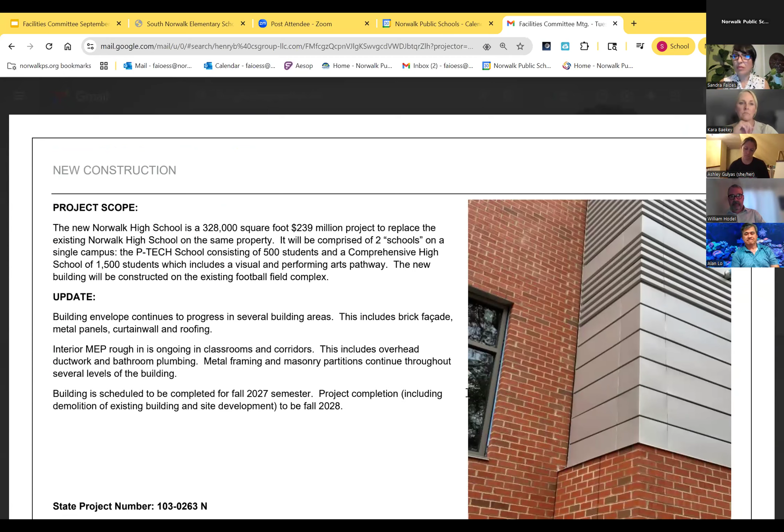Yeah, there's a few pictures in here. Portions of the building have windows and exterior veneers and brickwork and stuff. I think there's a couple more pictures after that showing some interior work.

So have you guys gotten a chance to go by? It is kind of exciting. Yeah, I went by the other night. It's going by pretty fast. Amazing. Wow, yeah, I'll have to get over there, I haven't been over there in a while.

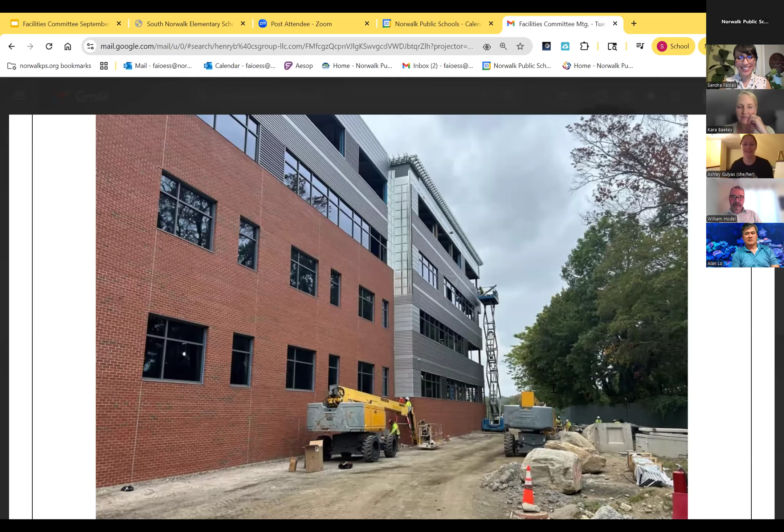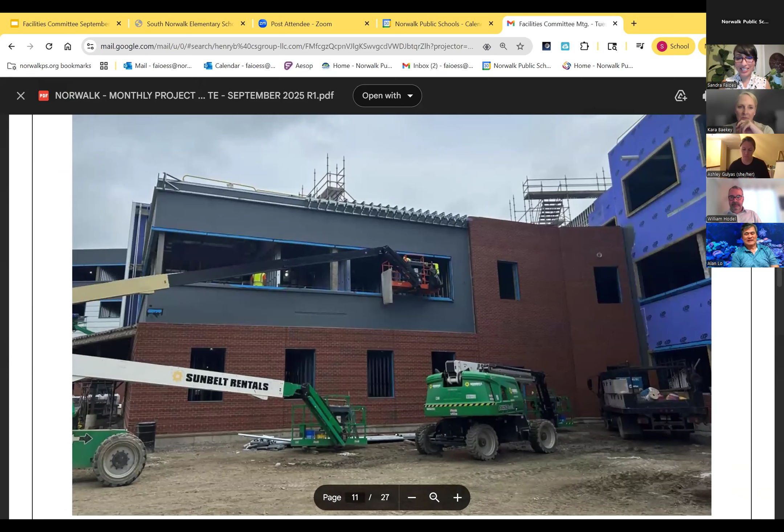And the building is not blue, it's just the panels. Wow, yeah, it's progressing.

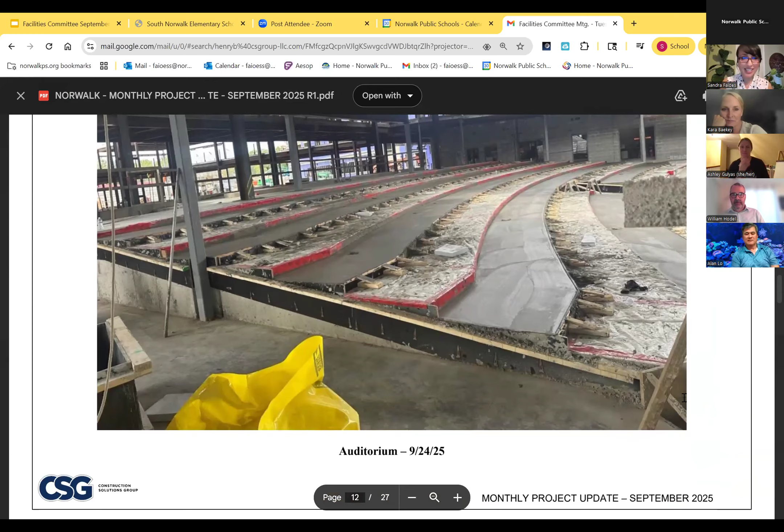Is that the auditorium area or something? I don't know what this picture is of. Is that the auditorium? Yes, that's a good guess. Yeah, so you can see the interior - there's quite a bit of interior wall and door frames up and stuff like that.

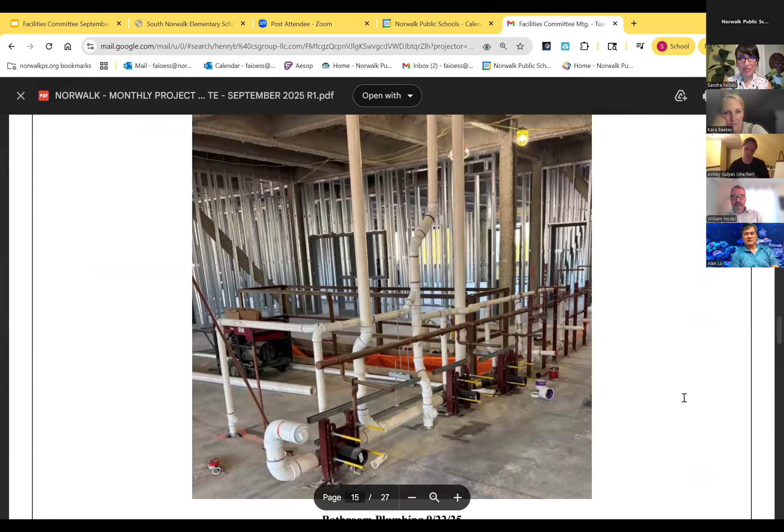Anyway, so that's where we are. I'm not planning to do any tour anytime soon, but at some point we may do a construction tour.

And the next project is South Norwalk School. As everyone knows, the school was opened, and for the fall semester we had the ribbon cutting ceremony. There we are. So everything worked out well.

Overall, a lot of times when we open a school, we always have some punch list items and miscellaneous issues that we need to continue to address. So we continue to meet every Tuesday to address all of the miscellaneous things. But the good news is that there's no major issues that we are encountering. It's just really touch up this and deal with all the miscellaneous issues typical with any construction project. So overall, it's a good thing.

I believe there's still... yeah. So anyway.

One thing I'm glad, just on a sidebar, one thing I'm glad is that I was never pushing to acquire that property, because there's a lot of stuff involved. But as I go through the ribbon cutting and see the whole property as a whole, I'm glad that we did it.

The council was pushing me to do it, and we did it. Well, I don't have a choice when they push me, right? At the same time, it's just a lot of work to acquire, and it's a lot of money. I mean, we spent probably like $3 million, or more than $3 million, to acquire all this property. But at the end of the day, when you sit out there with a basketball court, it makes such a difference.

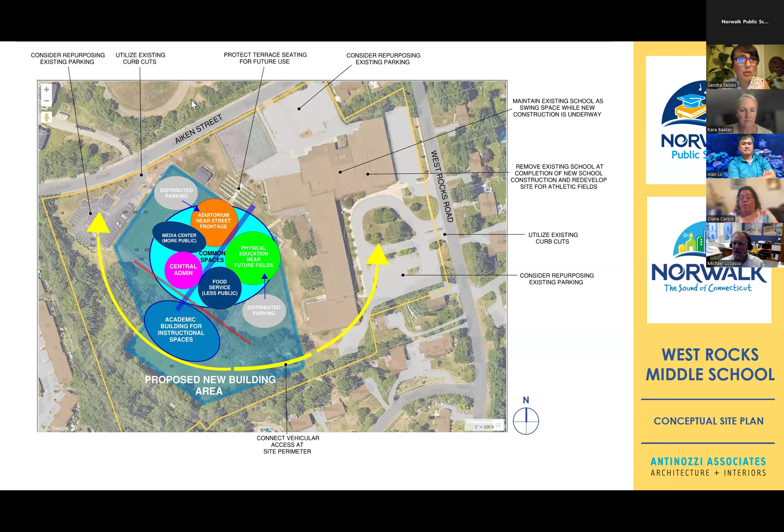Are you able to see it now? Yes, thank you. Okay Michael, do you want me to go back one, or are you okay with this? If you could, yeah, go back one, that would be great. I don't think it's allowing me to do both. We can start here then. That's fine, I don't want to... oh, okay, my apologies. Okay, what I won't do is share full screen, it won't allow me to manipulate it. Is this okay though to start here? That's perfect. Is everybody able to see the screen adequately?

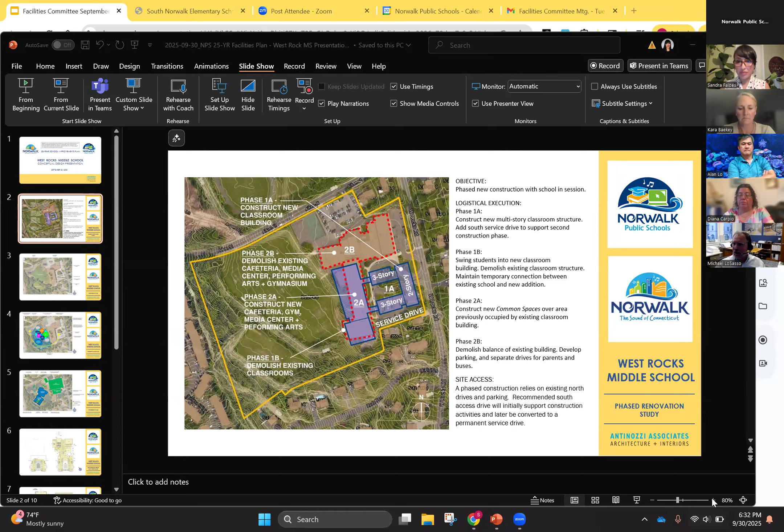Perfect. So, as Sandra rightfully clarified, our effort on this project was really essentially developing a conceptual plan, looking at different alternatives as to how we could execute the work associated with a modification to the West Rocks School. The plan before you was actually done previously. When we began the project, there was initially concern about developing on the portion of the site that had the fields.

Although I think we all agreed that was the logical location for it, the fields were relatively new, and there was concern that if we did so, we could potentially lose the use of newly installed fields. This particular plan was a sequential addition and renovation of the existing school, proposing a 2- and 3-story structure in the parking at the southeast corner of the site.

As that construction was complete, we would move students into that space, reflecting the academic sections, take down the academic 2-story section south of the existing West Rocks School, construct the balance of common spaces, and take down the rest of that section as well. That would ultimately provide a new school, but the sequencing and phasing suggested it would be significantly expensive, so we took a second look at this.

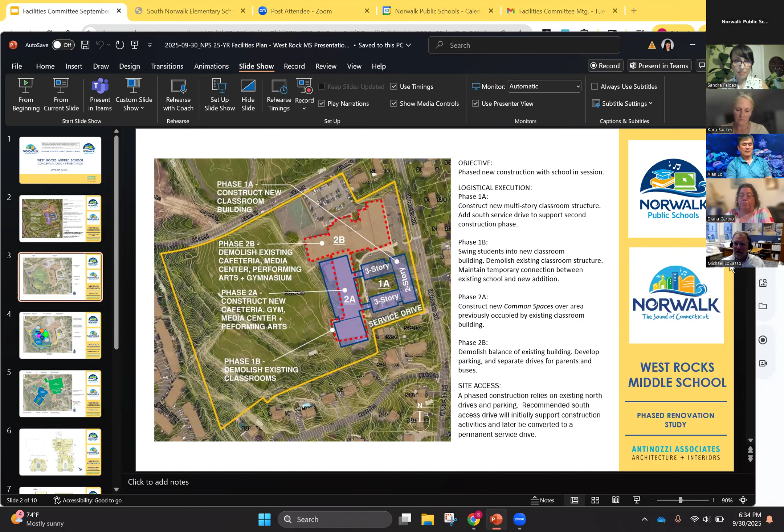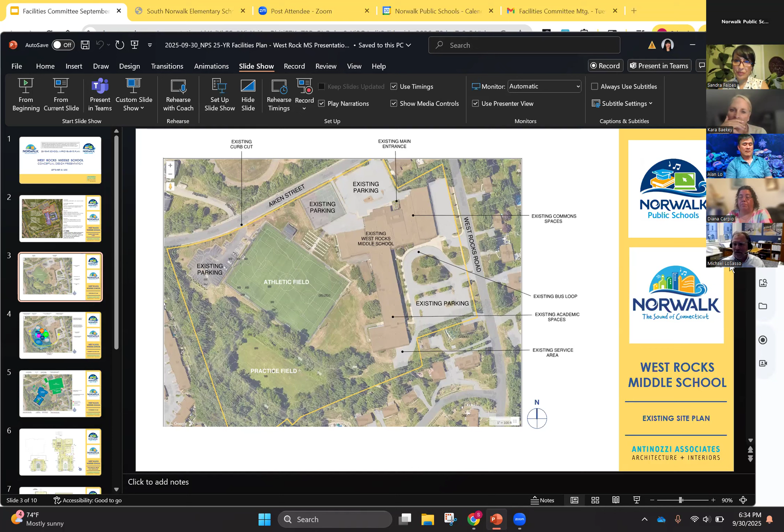If we could go to the next slide, please. This is just the existing site, and we provide this to give some insight into our approach. We identified specific aspects, both in terms of the configuration of the existing school and features we thought could be retained and reutilized, along with aspects of the new fields development that informed our future design.

Next slide, please. Thank you. This describes a diagrammatic relationship of spaces. What we found significant about the site was that if we were able to develop on top of the fields, doing so essentially allowed the existing West Rocks School to remain active without disruption, except for the absence of the athletic fields.

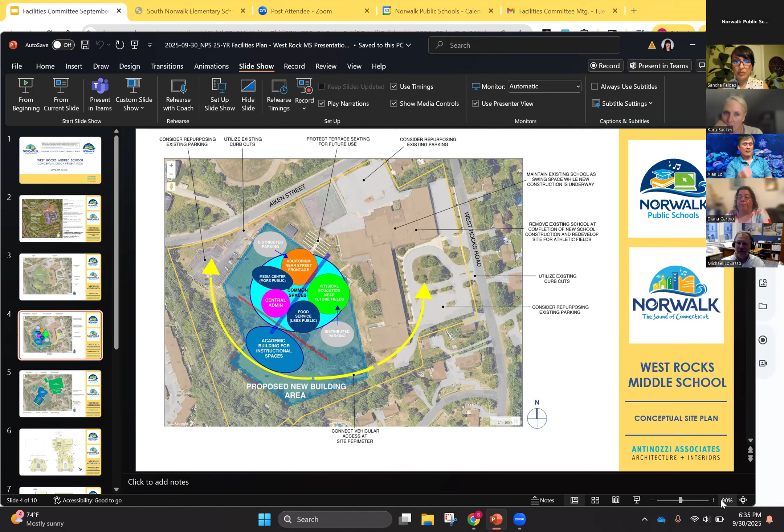We proposed the assembly of spaces informed in part by the existing terraces, the exterior seating provided for current sports viewing, and the orientation of the west parking lot in the northwest corner of the site, and began to array spaces in anticipation of the construction of a new school.

One of the challenges with the site is a fairly dramatic level change. We configured what we refer to as common spaces - the auditorium, cafeteria, those spaces oftentimes utilized after hours - in the upper field, and reserved the lower field, where the practice field currently is, a level below, for a multi-story educational section. The yellow line describes the connection of the drives, which is often advantageous for emergency responders and school access.

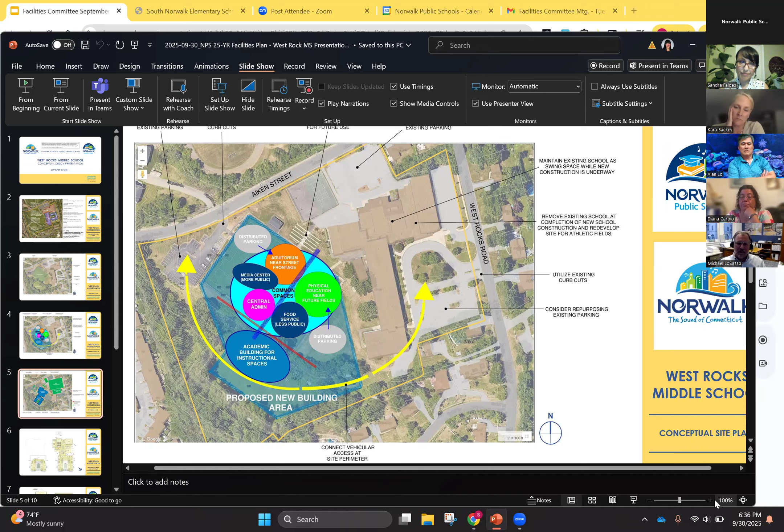If we could go to the next slide, please. This describes the conceptual plan that resulted from those initial conceptual layouts. What we've proposed allows a bus drop off on the northwest corner of the building, and an entirely separate parent drop off on the south side of the proposed new building.

The parent entrance off of West Rocks and through the drives provides extensive queuing, so we were proposing less impact on West Rocks and adjacent residential areas. Aiken Street to the north provided another existing curb cut that allowed the introduction of buses.

As I mentioned before, that terraced seating area on the exterior became a central feature of the building, providing an opportunity for outdoor seating for a two-sided auditorium. We'll look into the building - we'll have the opportunity to open the rear of the auditorium for outdoor presentations, as well as using the same auditorium with the closed rear for conventional auditorium use.

As I mentioned, we have the common spaces, primarily public spaces associated with the administrative offices in the center. The auditorium - we've programmed a gymnasium, cafeteria and food service, and a media center for the building, all at what we'd call the intermediate level. That intermediate level continues into the academic wing, and it's a level up or down for the different grades, so we've utilized floor level.

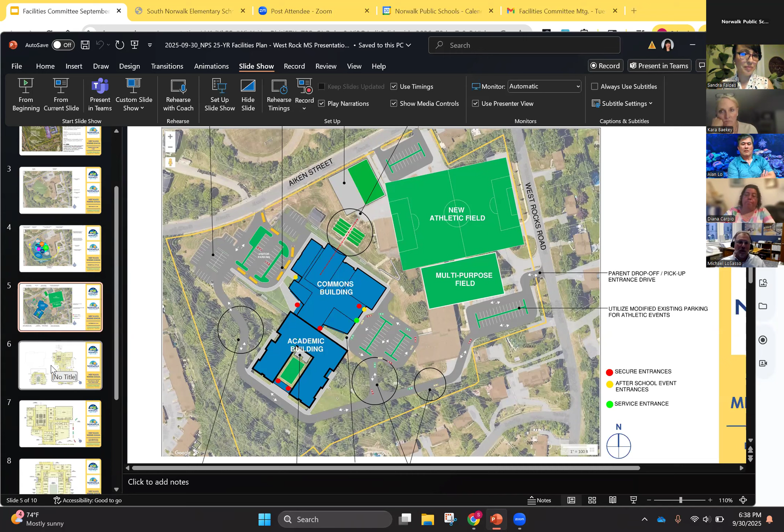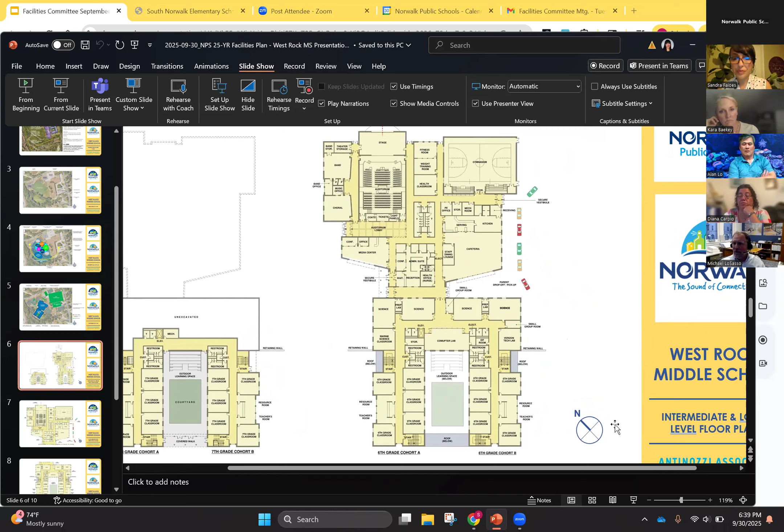This is a quick overview, and we'll zoom in a minute. The intermediate level is the plan on the right-hand side, and where the box shape at the bottom stops is the connection back to the academic spaces. So that plan on the right-hand side is the intermediate level that connects all the floor levels. On the left-hand side is a view of the lower level, one story down below this intermediate level, providing a complete section for a grade level.

I think in this case we actually had proposed the 7th grade, but really the classrooms as proposed are essentially standard for all grades, so it gives flexibility in terms of how they might be organized in the space, either lower level, middle level, or upper level.

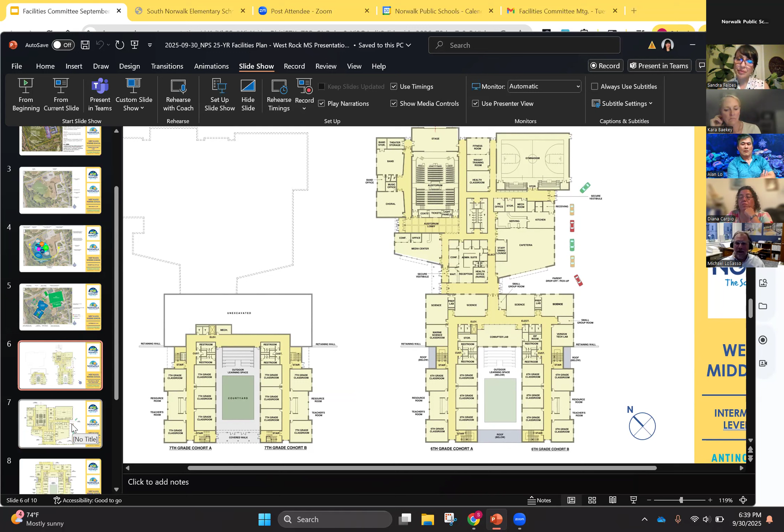The academic spaces are organized around an outdoor instructional and learning space, and each of the grade levels, 6th, 7th, and 8th, have 2 cohorts comprised of 5 classrooms.

For the purposes of this study, we assumed a total population of 720 students, essentially 24 students per classroom, though I do understand that there is a 28 student limit based on the teacher contract.

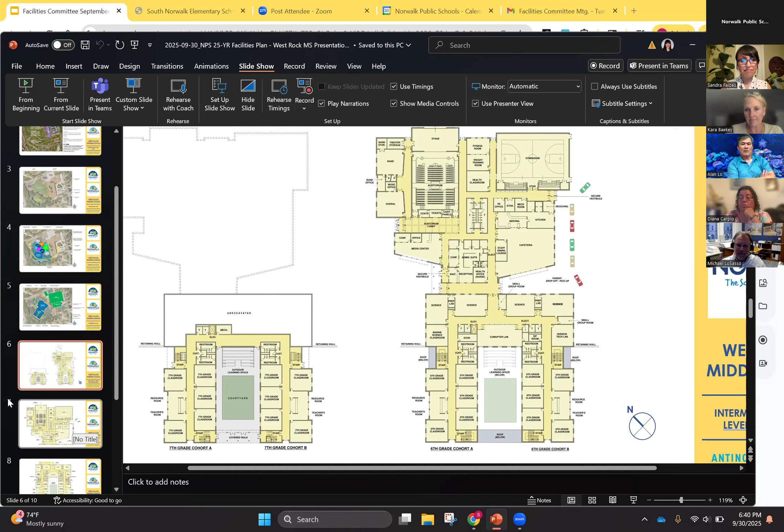If we go to the next slide, we can zoom in a little bit to this view of the common spaces. We've arrayed the spaces that tend to generate more noise, specifically the gymnasium, auditorium, music spaces, and the cafeteria in this area. We've separated them from the academic spaces to the south, and we've outfitted this to include band and choral spaces.

Essentially the program, though I have to mention this was developed without the in-depth educational specifications, which are currently being prepared. This was essentially a program that was derived from information gathered from the original building.

And as I mentioned before, we have the administrative suite centrally located in the building, and this provides us the ability to have the two entrances that we saw from the site plan, both from the north and south, so that students can then convey into the building in a controlled manner.

After school activities, the main entrance would be on the left-hand side, and that would be through a secured entrance, with appropriate resistance to intrusion.

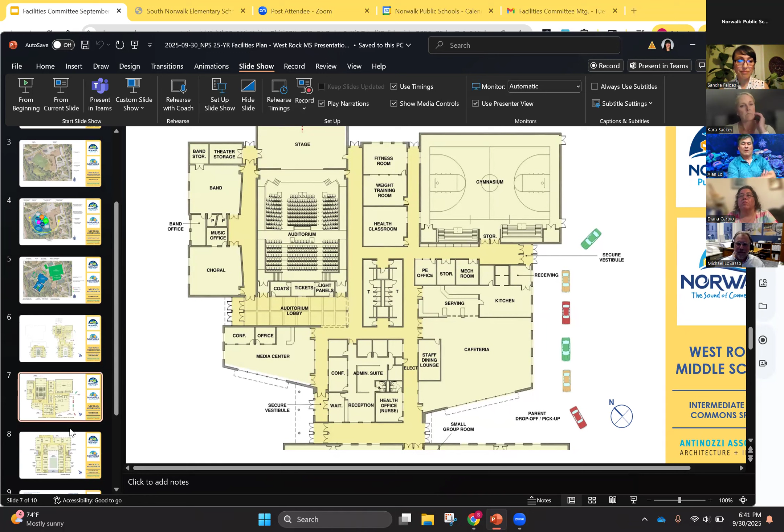And then if we go to the next plan, this is representative of the three different levels. On the upper portion, which is closer to the common spaces, we have classrooms associated with science and learning. This particular program envisioned a marine science classroom as well as a specific Verizon tech lab.

There's a centrally located computer lab as well. And then as you descend further into these spaces, the individual cohorts are more secure and separate from the access points to the north of the plan.

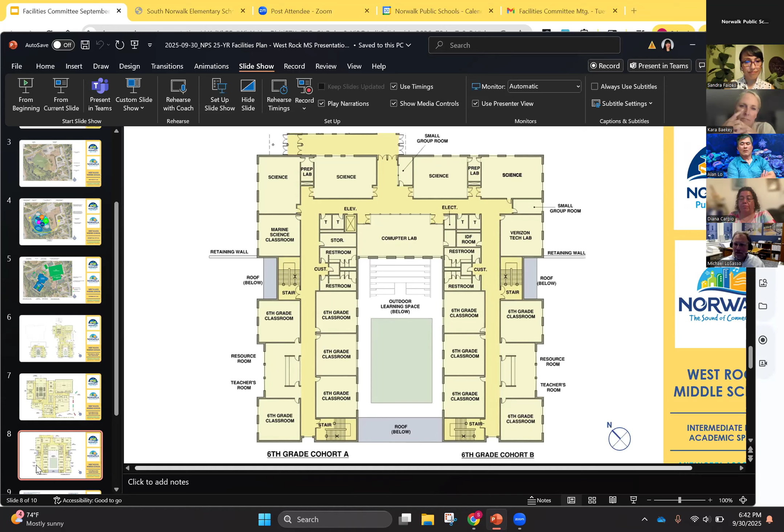And then I think we have one more slide. This information on the right-hand side is just the upper level, so it's very similar, with a few different program types. We have the visual arts on this particular level, which is sort of centrally located, and again, additional science classrooms.

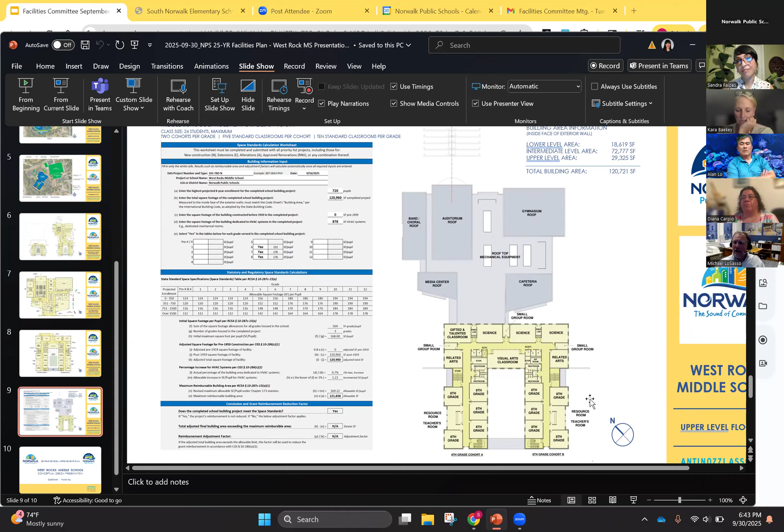On the left-hand side is the state's current form used for determining square footage eligibility. In this case, based on benefits and bonuses available in this form associated with mechanical spaces and so forth, we're looking at a building for 720 students that affords about 121,000 square feet. In the upper right-hand corner, we've done the area takeoffs associated with the proposed conceptual plan, and we're just under 121,000 square feet.

So we think that this particular plan, although it will likely be modified as the ed specs are developed, is certainly within the realm of possibility relative to state grant funding. And that concludes my portion of the presentation, and I'm happy to address any questions.

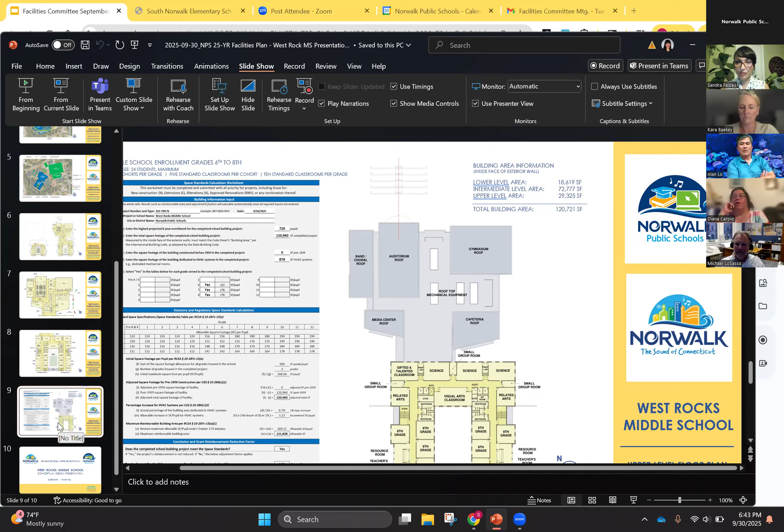My question is, if you want to go back to the athletics field, that lower field at that school, I know that was always a question because of flooding and drainage. Is that something that you guys are looking at or have even discussed now?

It has come up actually in meetings previously, and we are aware of it. Any site development of that nature would obviously have to take into account the flooding and wet nature of the site. We also have to make provisions—there was an issue raised that water was impacting adjacent sites. So the development of this site would have to be done in a manner that would prevent any runoff going onto adjacent sites, in accordance with state statutes. Thank you.

Any other questions regarding this conceptual design? I'll have a few updates just on the rollout of the project, but anything on these particular slides from Michael? Nothing from me, thank you.

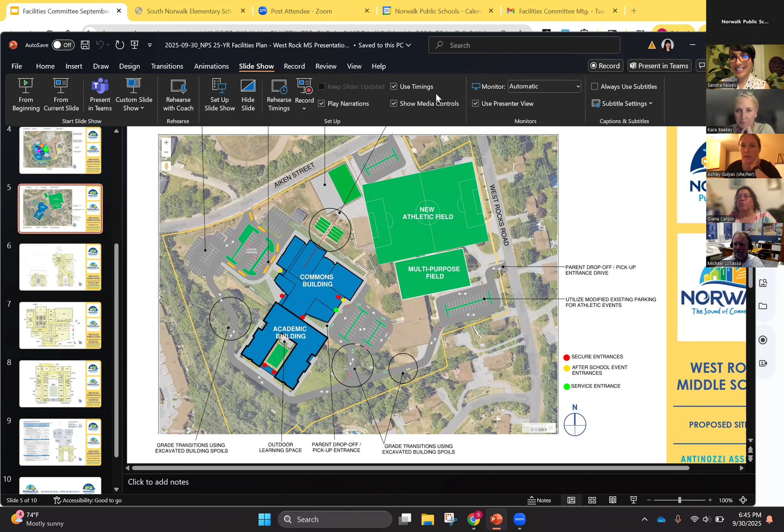No, I had sort of the same question as Diana about the drainage on that lower field. I'm going to stop sharing that because I'm going to turn back to my other presentation, if that's okay with everybody. Thank you for your patience as I switch through.

So if there are no questions on the conceptual design, I just wanted to give you guys some highlights. The application to the state, and thank you Michael so much, will be June 2026, with tentative groundbreaking for spring 2028. By then we will have Norwalk High P-Tech's fields back online so it won't be as stressful on the community in terms of having some fields offline.

We project completion of fall 2030. Michael went over the square footage. This is a very rough estimate based on numbers that Alan Lo ran for us, just in case you're ever asked. But this is a very preliminary number because we have not yet done the education specifications to actually price out the project. The reimbursement rate is 60%, and I wanted to share that there will be a community engagement on the 7th, which we will advertise.